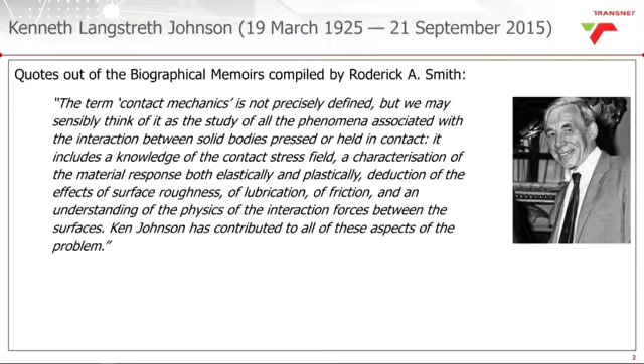It includes a knowledge of the contact stress field, a characterization of the material response both plastically and elastically, deduction of the effects of surface roughness, of lubrication, of friction, and an understanding of the physics of the interaction forces between the surfaces. Ken Johnson has contributed to all of these aspects, and this statement again shows the complexity we have to deal with in contact mechanics.

His major publications include topics in friction and wear, rheology and lubrication, rolling contact and adhesion. Important applications of his insights included the prediction of corrugations and cracks in railway lines. This brings me to corrugation on wheels, so we'll start with the presentation.

The agenda for the presentation will be a problem statement, then a bit about the monitoring of polygonization, then excitation mechanisms. We've got two hypotheses which I want to go through, and the way forward.

So where did it all begin? We heard complaints from the drivers of locomotives that for some locomotives there was a vibration which was a nuisance factor. This occurred on our newer kind of AC traction locomotives. We did ignore that initially because the complaints were not consistent, but eventually we realized that something is going wrong. Here we can see premature failure of some bogie components.

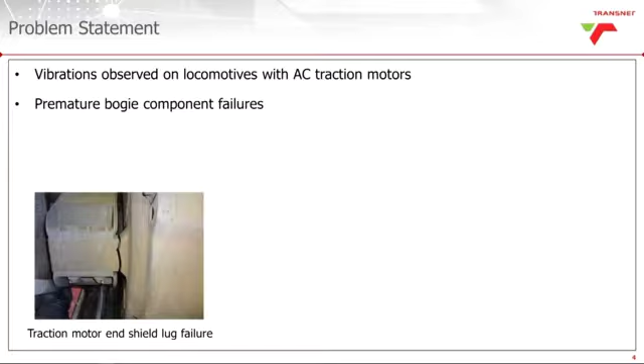Here the traction motor end shield lug failure. And we have got lateral stops where the bolts were missing here. And the primary spring failure here, not due to metallurgical or design factors, more for fatigue loading. And there were many other components.

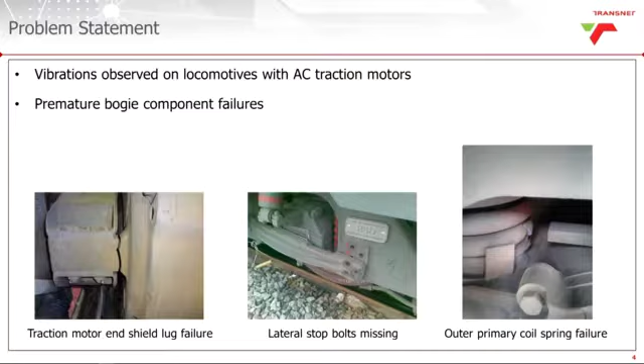So the vibrations were suspected to shorten the life of the bogie components. A comprehensive data analysis was done so that we could assess the situation, and eventually we realized that maybe it is out of round wheels which are causing these vibrations we have been complaining about, and where the fatigue failure has resulted from.

So we had to do a few measurements. We took the locomotive into the underfloor wheel lathe, put some displacement transducers in there, rotated the wheel, and took the measurements. The results were very, very distinct: a 20th order polygonization around these wheels. That was very, very clear.

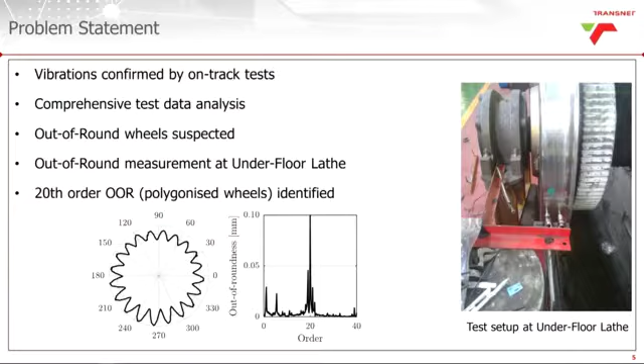So now we knew that the wheels were out of round, and that is obviously causing the vibration. But the question is, what is the root cause? What is causing the wheels to go out of round? So about 2 years later, I'm standing in front of you trying to present where we are today.

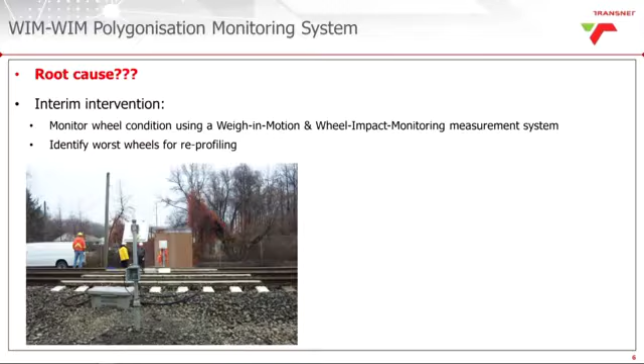While we were researching the root cause of this phenomena, we had to control the locomotive fleet by having regular measurements of out of roundness, identifying the worst locomotives and taking them to the workshops for reprofiling. So we use the standard weigh in motion wheel impact detector, or WILD system as used in America, to measure the forces of passing wheels, and then we had an algorithm developed that could guide us in terms of the severity of the out-of-roundness.

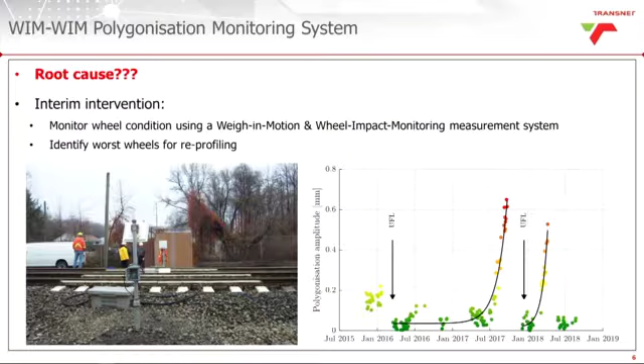Here is an interesting graph from those monitoring results. We had the locomotive coming into an underfloor wheel lathe, and we can see the polygonization amplitude is very low, and then it stays like that, and then all of a sudden it shoots up. This is where we then said, okay, the locomotive must come in again for reprofiling so that we control it within acceptable levels. This was a mitigating action while we were doing the research.

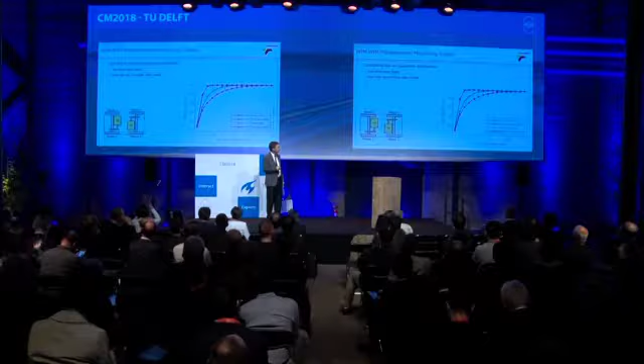For the second locomotive, locomotive A, we see two different graphs here. We found a difference in the amplitude of the out-of-roundness depending on whether that wheel is on the gear or non-gear side of the bogie. So here we would have the non-gear and gear side. These have lower amplitudes and the other ones higher. This is consistent through all the locomotive wheels, so it gave us a clue where to start searching for a possible solution.

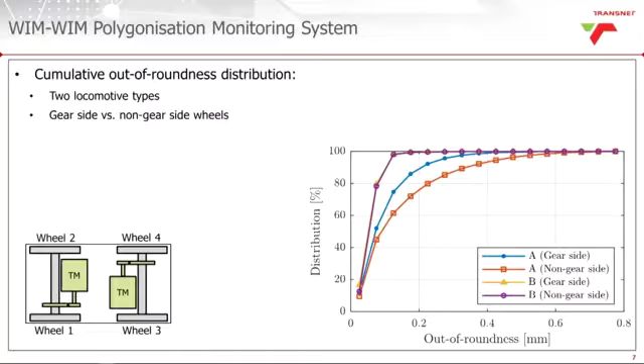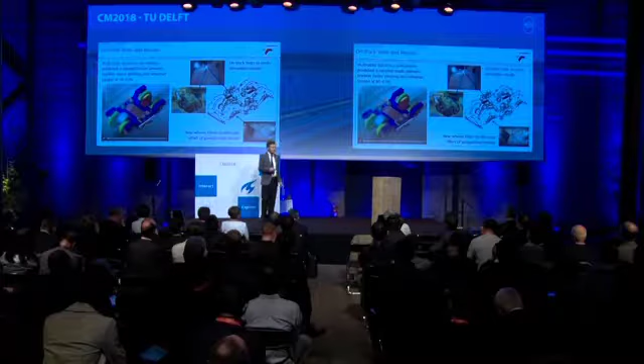What was very important for these tests was that we made sure the wheels used during the test have got no polygonization - they're out of the box. This was because we wanted to see the things happening behind the scenes that are causing the torsion.

So two hypotheses are presently being pursued. My two colleagues, Uri Spangenberg and Edward Reitman, have been spending a lot of time on them. The first hypothesis is torsional resonance of the axle due to self-excited stick-slip vibration under saturated adhesion. The second hypothesis is torsional resonance of the axle due to forced excitation by the harmonics and interharmonics of the traction motor. I believe we will see that both are contributing to the eventual polygonization.

So for the first hypothesis, self-excited stick-slip vibration, we again started with a simulation model to determine the stick-slip vibration. The model was created with a flexible wheel set, and we were trying to find if we can generate a difference in the adhesion conditions between the left and right-hand wheel, which we did while increasing the traction onto the wheel set in the model more and more.